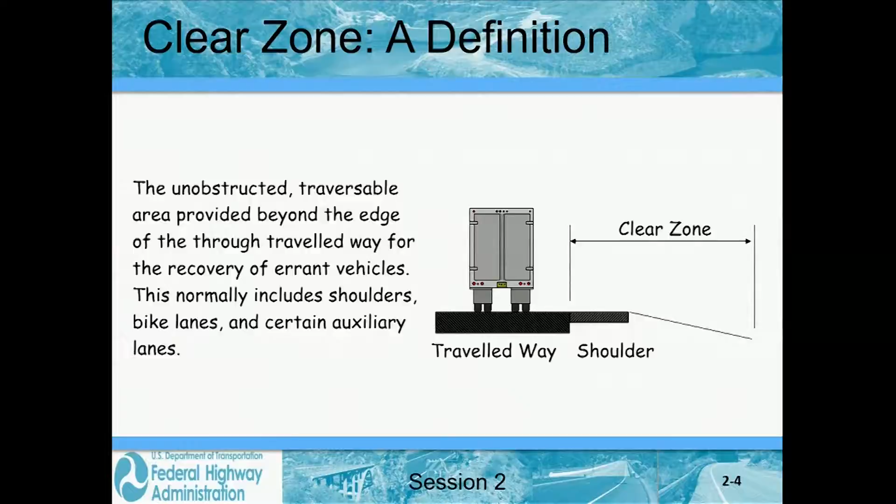30. For counties, it's probably pretty low, but if we're talking about state engineers and they were talking about freeways, 30 foot is a number that usually comes into play. But we're going to talk about that and tell you where it came from.

Okay, AASHTO started talking about clear zone way back in '74. How many of you were not even born in '74? That's a fairly old class. Usually at least half of you guys raise your hands.

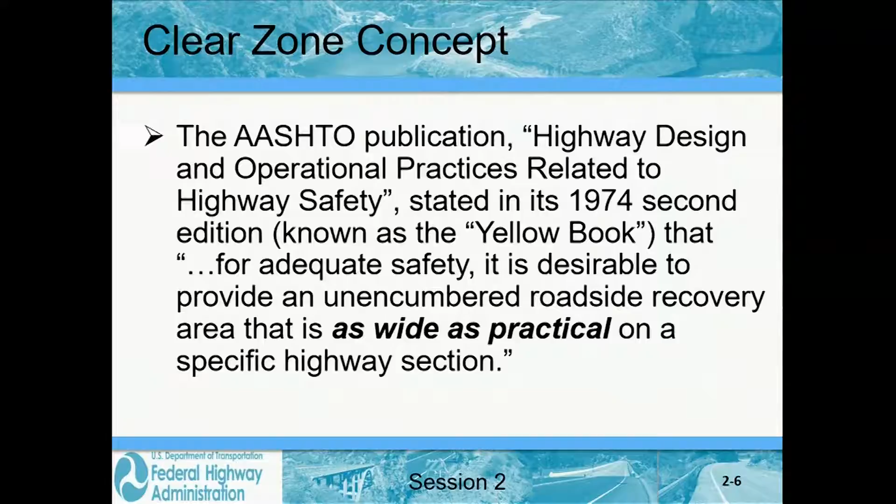Okay, anyway, it said it's desirable to have a recovery area, an unencumbered roadside area, as wide as practical. And as wide as practical makes sense.

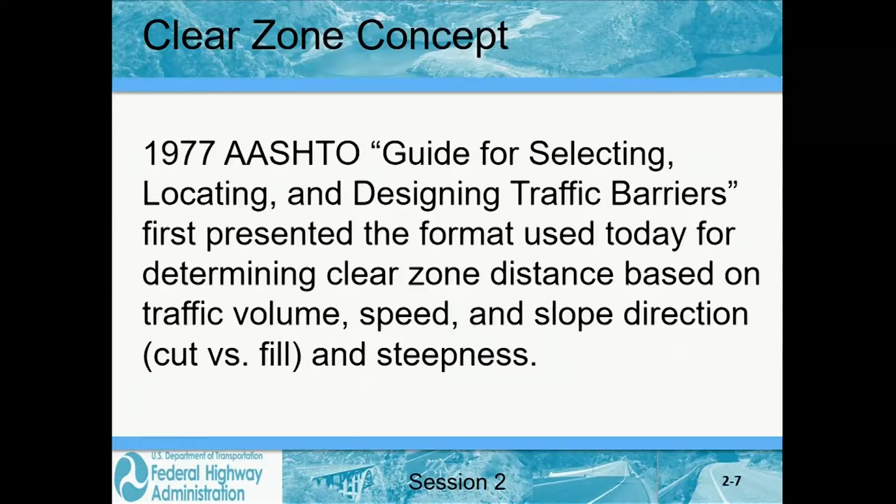But then the 1977 AASHTO barrier guide came out, and it said the clear zone isn't a fixed number - it varies depending upon some characteristics. And that includes design speed, which makes sense. The faster you're going, the longer it's going to take you to stop. Nobody's going to argue about that.

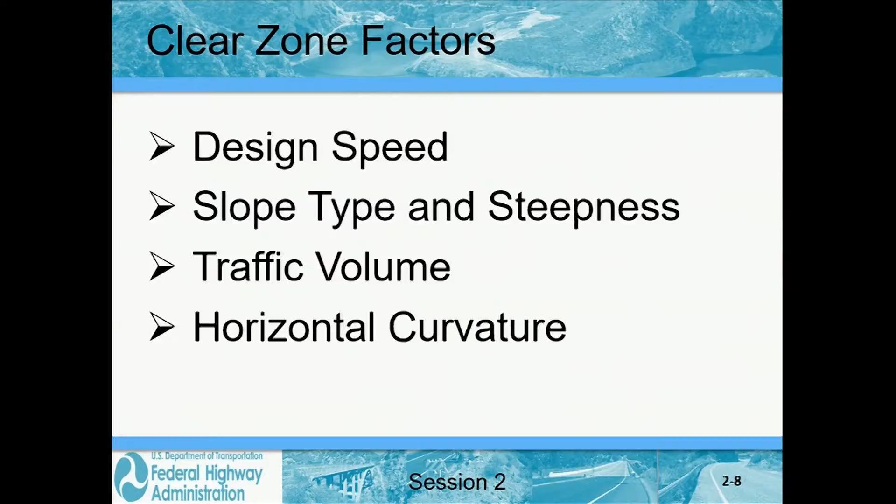Slope type and steepness - if you run off the road on a fairly steep slope, you're going to probably go to the bottom of the slope, so you're going to go further away from the road with less vehicle control than you would have if the roadside were flat. If you're running off the road on a cut slope, then gravity is working against you and you're not going to go quite as far from the edge of the roadway.

Are we still focusing on design speed, or are we shifting to target speed - like how fast we want the traffic to go, and keep that in mind when we're designing our roadways? Basically, for purposes of selecting a clear zone or other things, we generally use design speed because we typically know what that is. Obviously, in some cases the actual operating speeds are significantly less, at least on portions of the roadway, and in some cases they're probably more, particularly on some of the freeways.

Traffic volume. How does traffic volume affect how far you're going to go if you run off the road? Okay, the quick and dirty answer is it doesn't make any difference. If you run off the road at 70 miles an hour at a 10-degree angle, you're going to go the same distance.

Whether it's a county road versus I-5. So the only difference between those two is if you do it off the 5, there's probably going to be people watching you do it. If you're on a county road, you may be all by yourself.

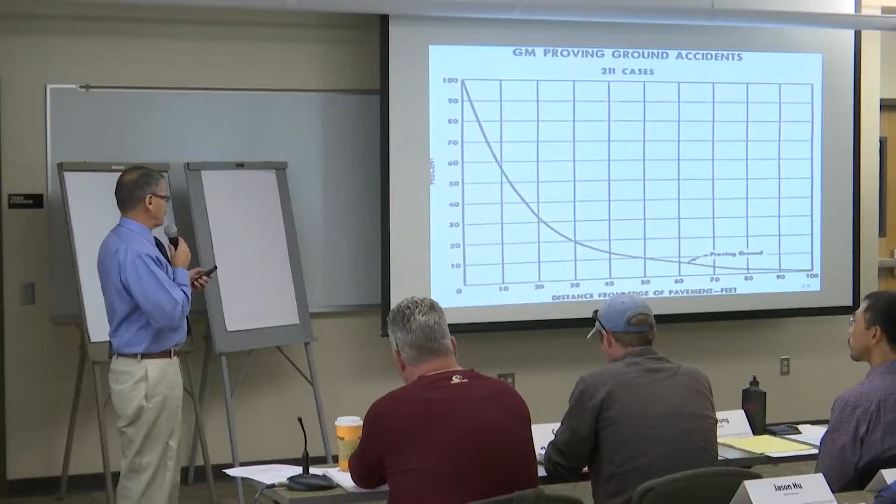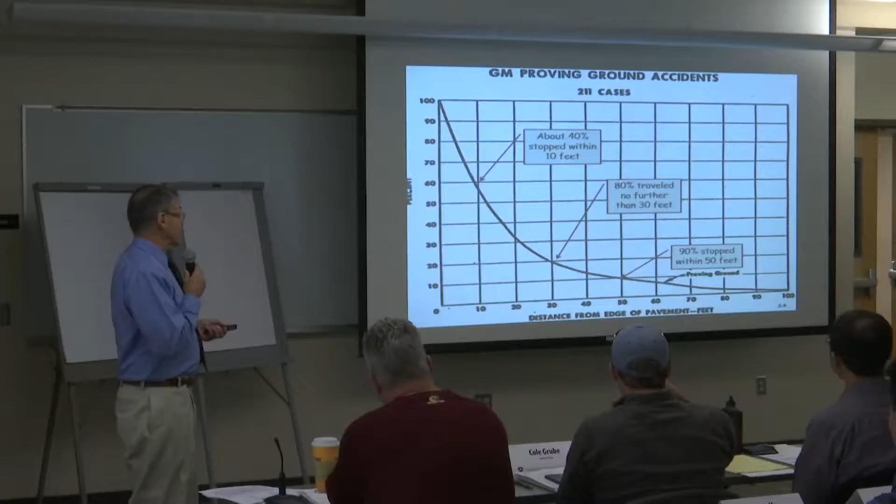So they did a study, and they only looked at just slightly over 200 instances where their test drivers ran off the track. After looking at each one, they found about 40% were able to stop before they went 10 feet laterally from the edge of the road. They looked a little further and found 80% didn't go any further than 30 feet. Continuing, they found 90% stopped within 50 feet.

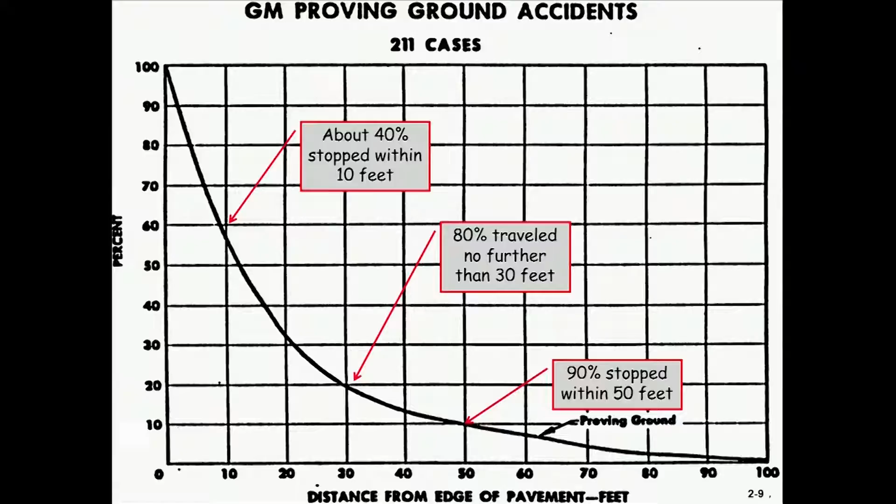So the engineers figured this was a pretty good break point. If we can provide a 30-foot minimum clear zone, then 80% of the vehicles that run off the road are likely to stop in that distance.

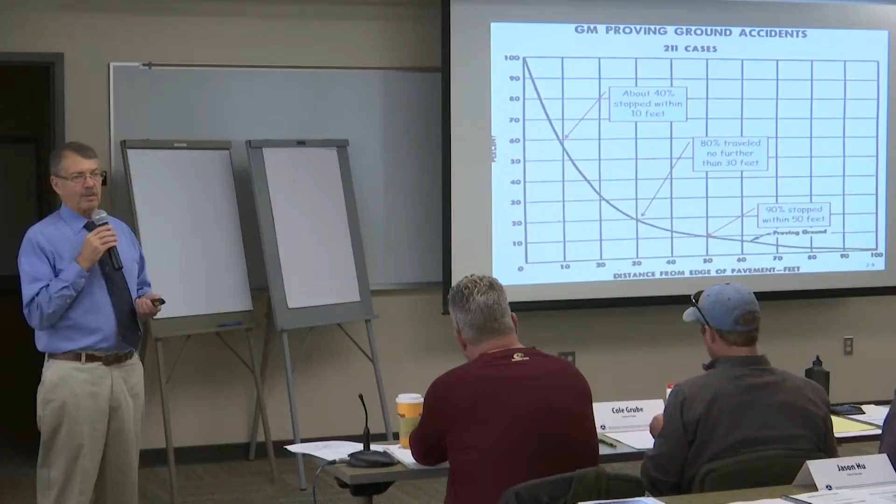But again, the data came from a very small number of cases. They were professional drivers or test drivers riding on a one-way familiar track, and it's not too surprising that they were able to do that. But that doesn't correlate to the driving population in general.

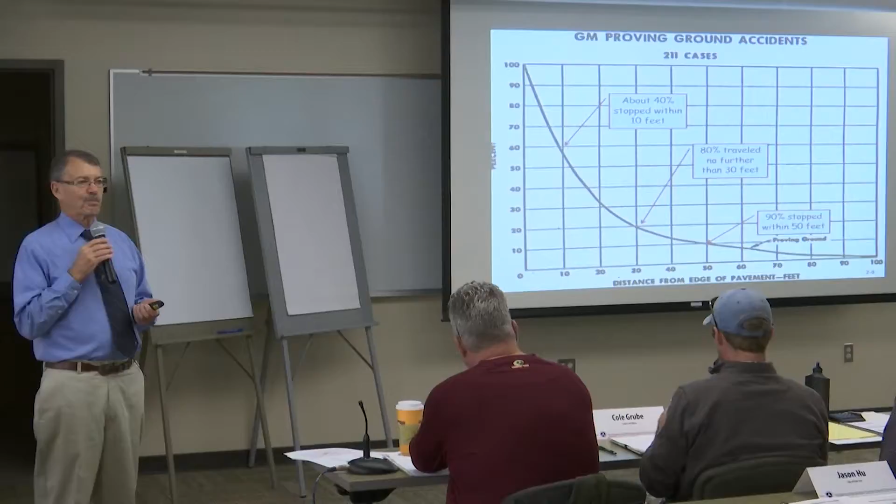Except for us folks in the highway profession, you don't see a lot of professional drivers on the road. You see people doing some pretty dumb things, actually. And we're not always driving on one-way roads, and we're often driving on roads that are unfamiliar to us. So that 30 foot is a minimum number.

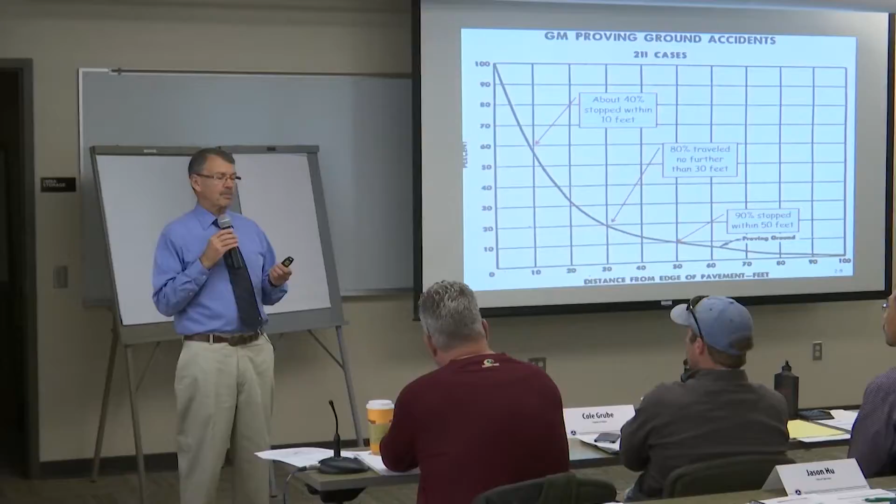It's better than we used to do because we used to not think about it at all. When the interstate was first built in the late 50s, early 60s, we had bridge piers right at the edge of the shoulder and didn't even think about shielding them. Well, we've come a long ways from that since then, so we're doing it.

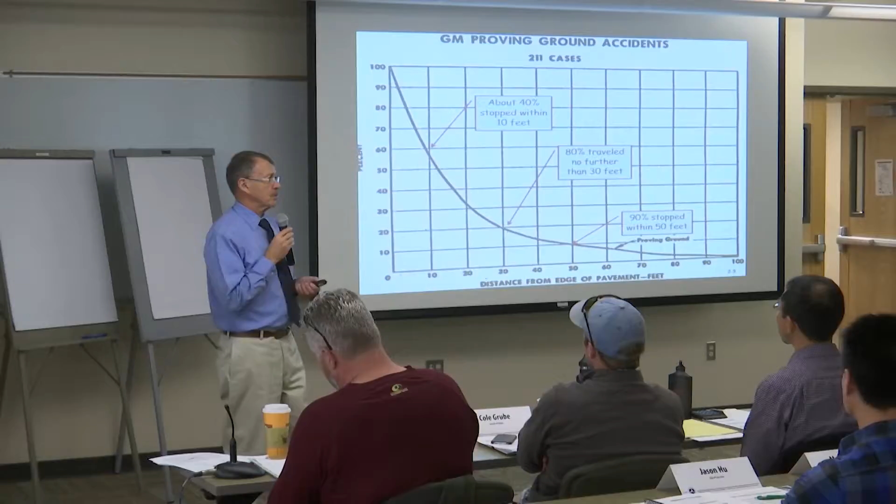Yes, sir? Just out of curiosity, on the vertical axis, that percent, what does that represent? I can't quite figure out how that relates to this graph.

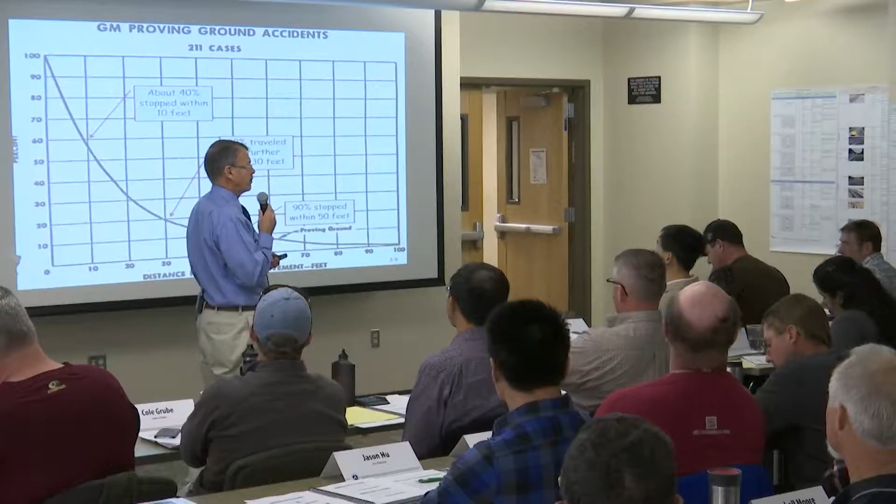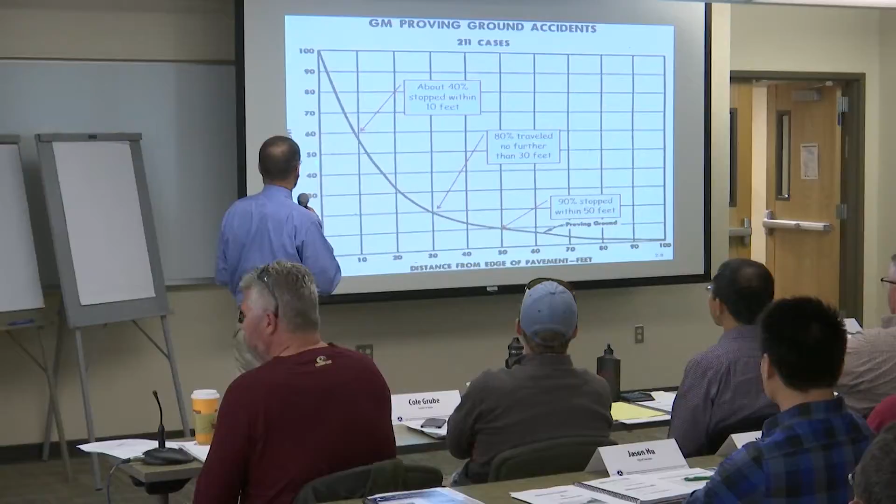Would you say it's 20%? Okay, this is 20% of the cases? This is a cumulative percentage of cases. In other words, 20%... and then this is a distance down here. So 20% were not able to stop, so 80% were able to.

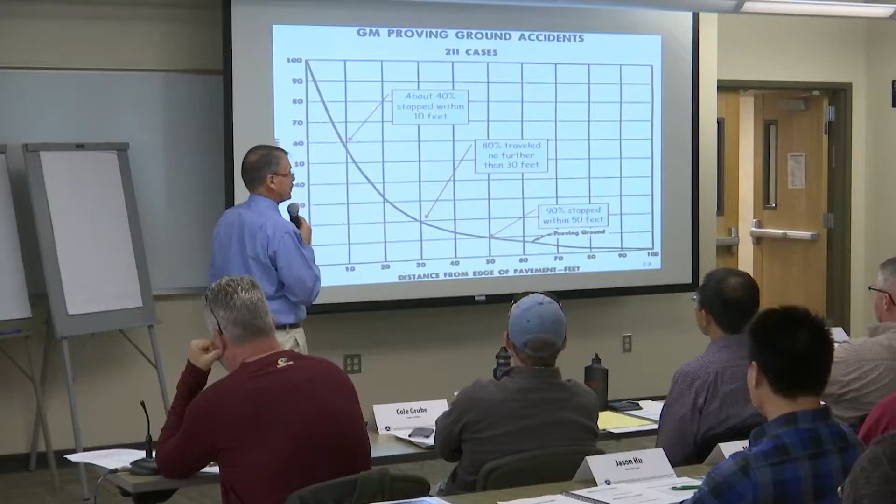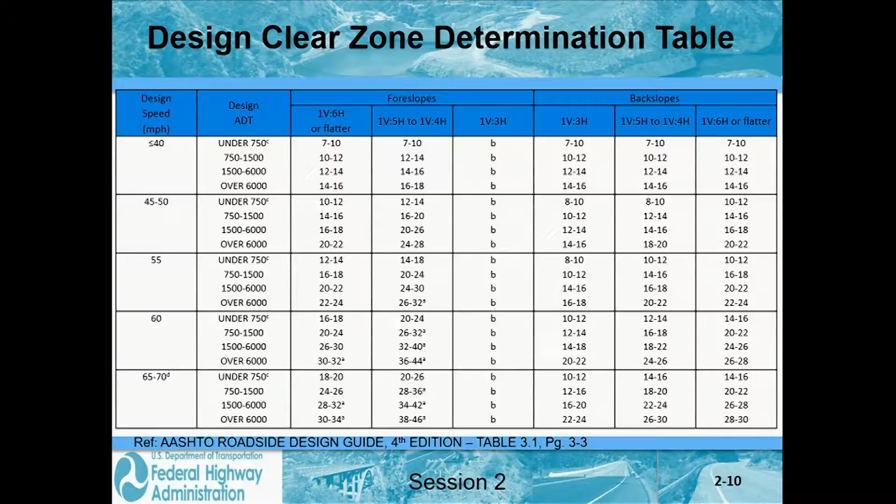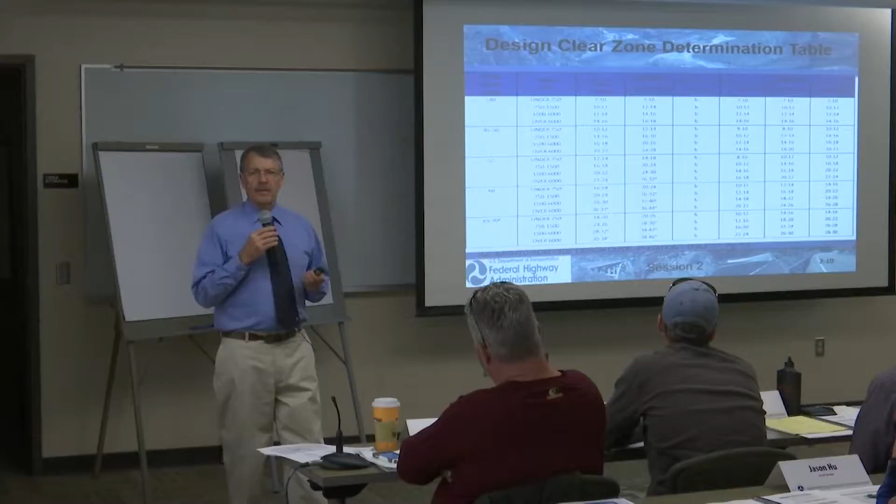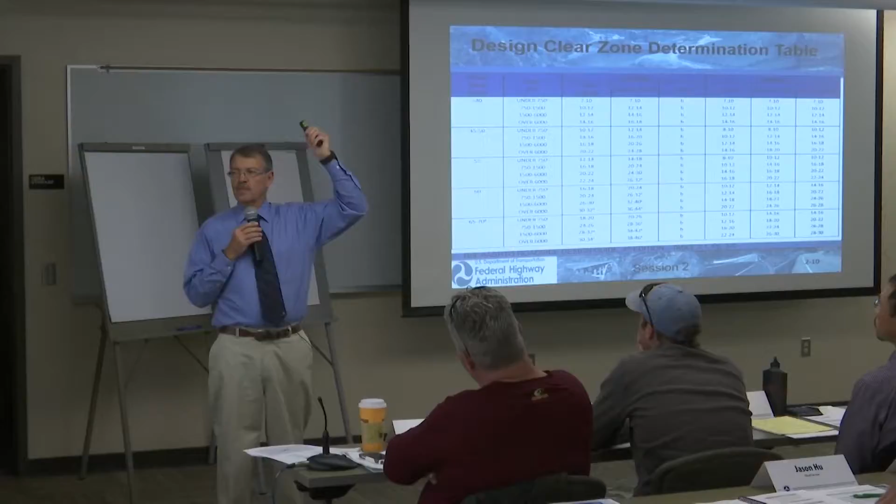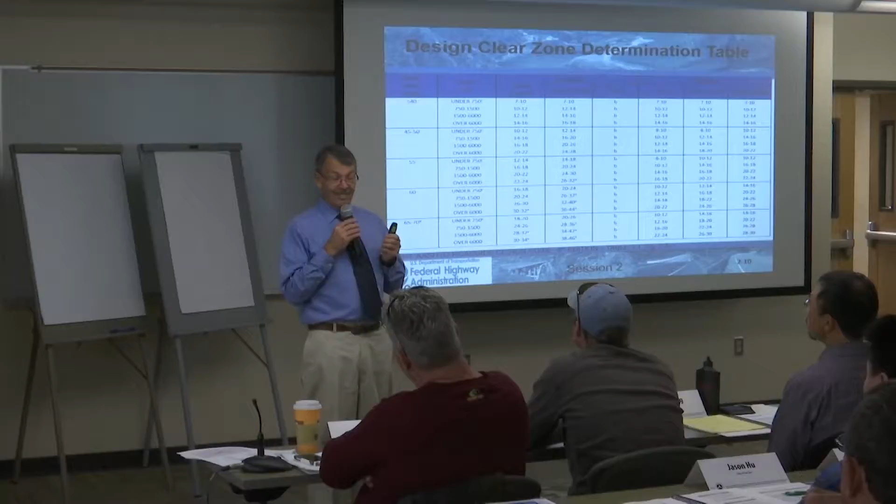How many of you have military service? Got a couple. How many are hunters? I thought maybe in the rural part of the state there'd be a few more hunters, but anyway. What do hunters and soldiers have in common? I asked this question, and I'm pretty sure it was in California about 20, 25 years ago, and someone in the back of the room said, 'They shoot people.' I decided I would never go hunting in California.

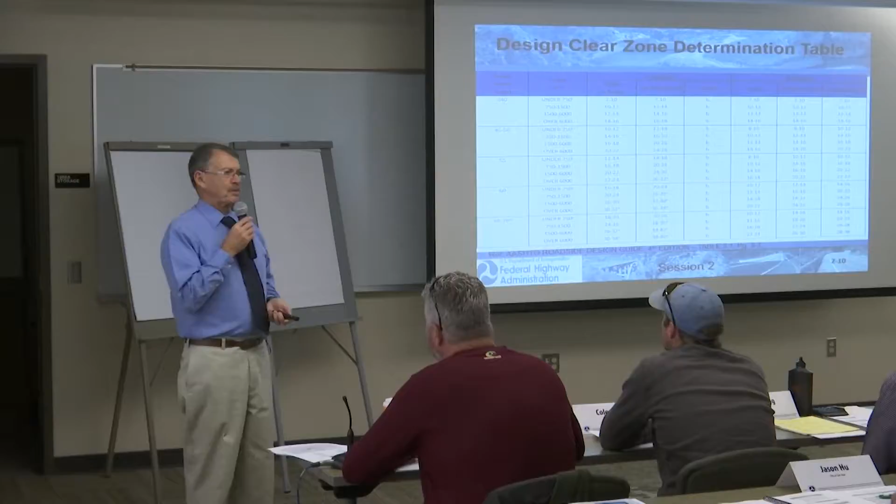But the answer I'm looking for, of course, is rifles. They have guns. And if you've been in the military, you may have spent half a day on the rifle range where you fire 3 rounds at a target and try to get all those bullet holes really close together. When I was a kid growing up in New Hampshire, before deer season, my dad and I used to go to a nearby sand pit for essentially the same purpose.

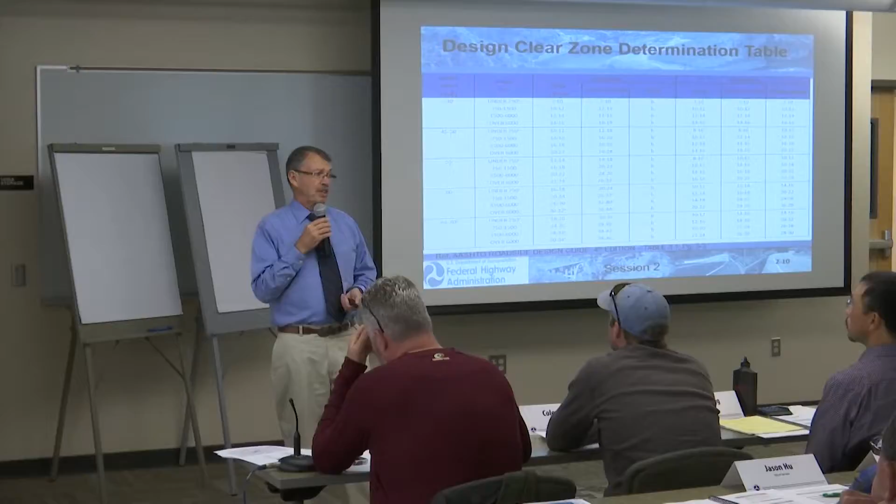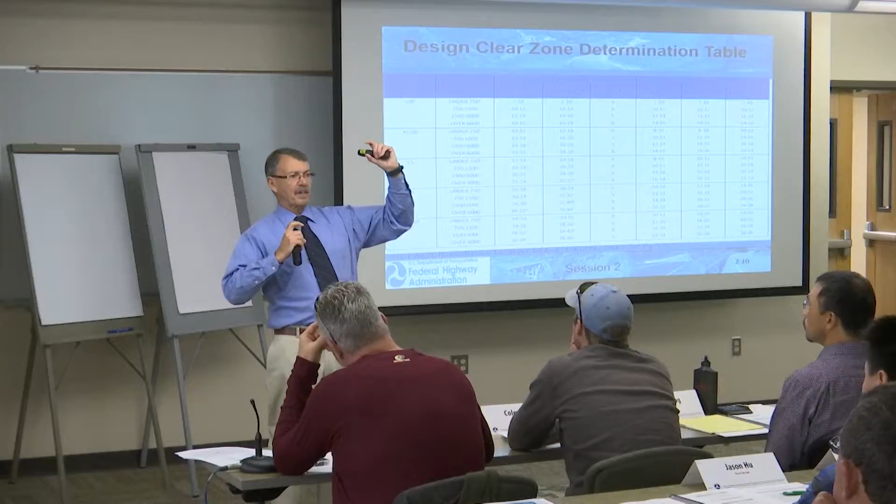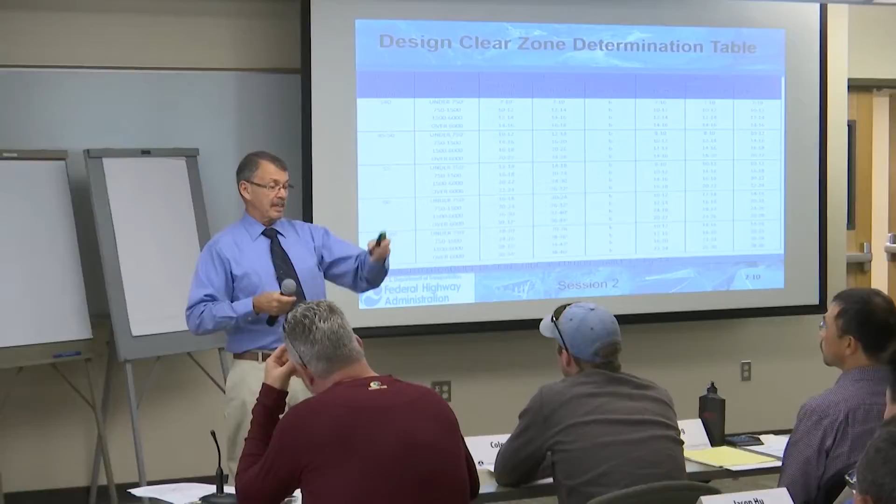We'd fire a few rounds at some targets, and if we hit them, the sights were set properly. But if you can get a grouping of bullets that's very, very tight, and the bullseye is down here somewhere, it's not very accurate shooting. It's very precise, the bullets are going where you want them to, but it's not accurate because you missed the bullseye. I like to use this analogy when I look at this chart. It's like, man, we've got that clear zone pinned down to within 2 or 3 or 4 feet, but as far as accuracy, plus or minus 50%.

Usually there's either dead silence or a bunch of sighs in the audience when I make that statement, because most of you are engineers, and you may have gravitated towards the engineering profession simply because you like numbers. You like to plug numbers into a formula and get the answer to 5 or 6 decimal places, right? For most of engineering, of course, you need to do that. You don't want your bridges falling down, you don't want your pavements rutting right after you open the road to traffic, you don't want your culverts washing out in a 2-year flood.

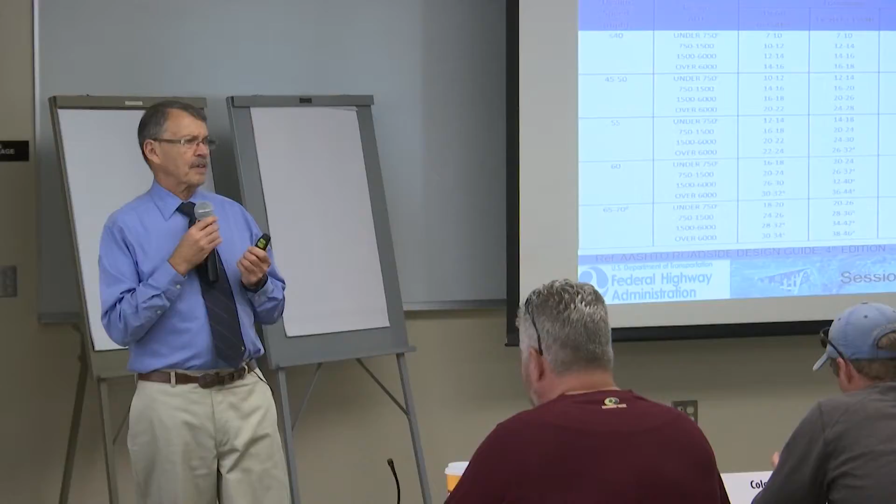So for most of engineering, you have to be both precise and accurate. But clear zone numbers are different, because there's no rule, no regulation, no physical limitation that says when you run off the road, you can only go 18 feet or 20 feet or 30 feet. Common sense will tell you that when you run off the road, you go until you hit something and stop, roll over, or are able to control your car and stop safely or return to the roadside. But 30 feet isn't very much distance when you're going 60 or 70 miles an hour.

So where does that lead you with clear zone? Keep in mind these are minimum distances. I like to paraphrase John Fitzgerald Kennedy: when you're asking, you don't ask how much clear zone do I need and pick this chart for minimum. You ask instead, how much clear zone can I reasonably get? And if you get as much as you reasonably, practically can, then you've probably done the best job that you can. You should always meet the minimum, or document why you didn't, but if you can get more than that, go for it.

One example: if you've got a culvert that's 10 feet from the edge of the road, and you go through all the trouble of extending the culvert and putting a new end wall on, and when you're done it ends up 20 feet from the road, you've done a little bit of good. But if you're going to extend something, you should extend it far enough so it's almost unlikely to be hit.

Crash rates on curves -- again, all other things being equal, the crash rate on a curve could be 3 times as high as it would be on a tangent section of roadway. If somebody's going too fast for conditions, or just plain too fast and not paying attention, they're probably not going to run off the road on a straight section unless they fall asleep, but more likely on a curve.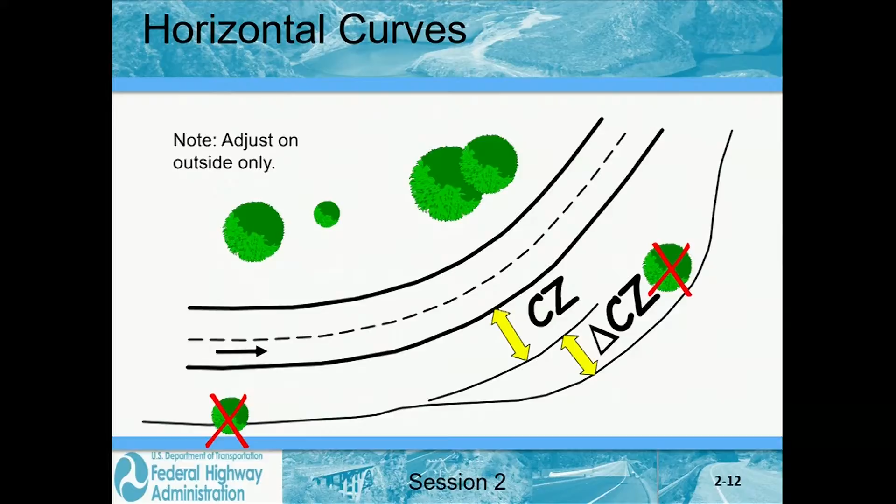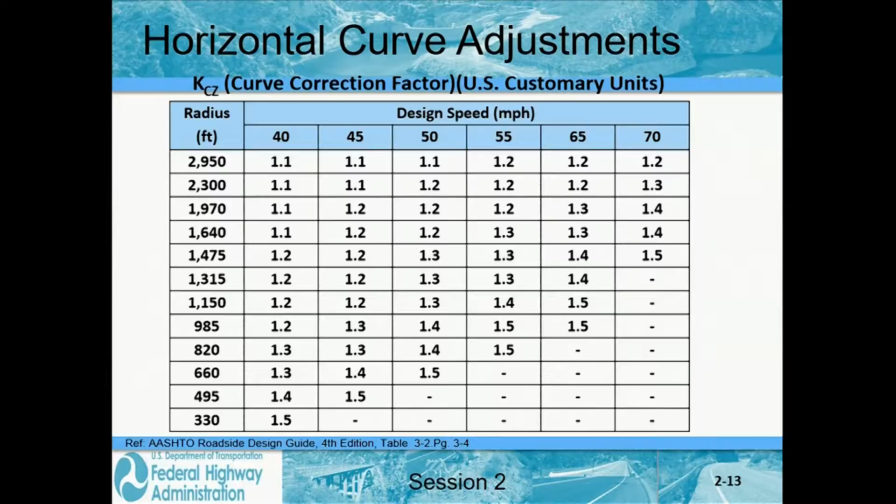So what the roadside design guide suggests is that you extend the clear zone on the outside of the curve. How much? It depends on the design speed, the sharpness of the curve, and then you multiply the standard tangent clear zone by a factor. You can see here the biggest factor is 50%, or 1.5. So if you've got a sharp curve and your normal clear zone is 20 feet, you say, okay, we'll make it 30 feet on the outside of the curve.

Some states do this, some states don't. But if that additional 10 feet or so isn't flat and traversable and recoverable, then you're probably wasting your time messing with it, because it's not likely to do much good.

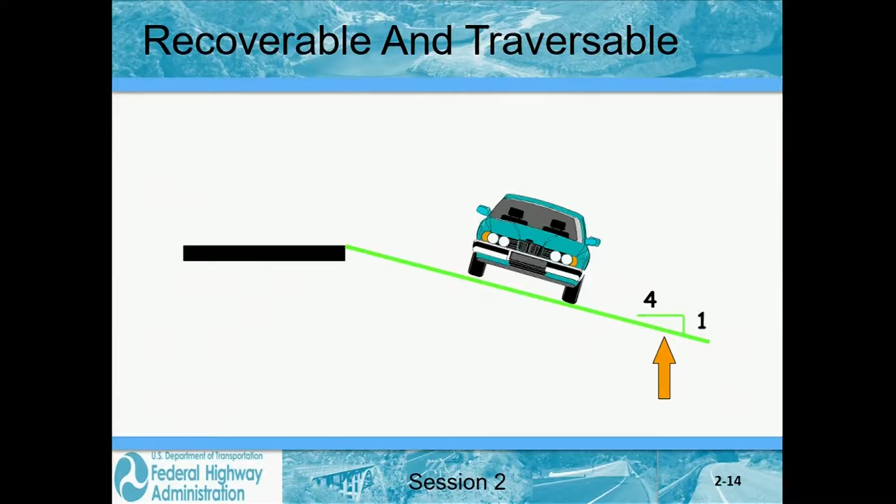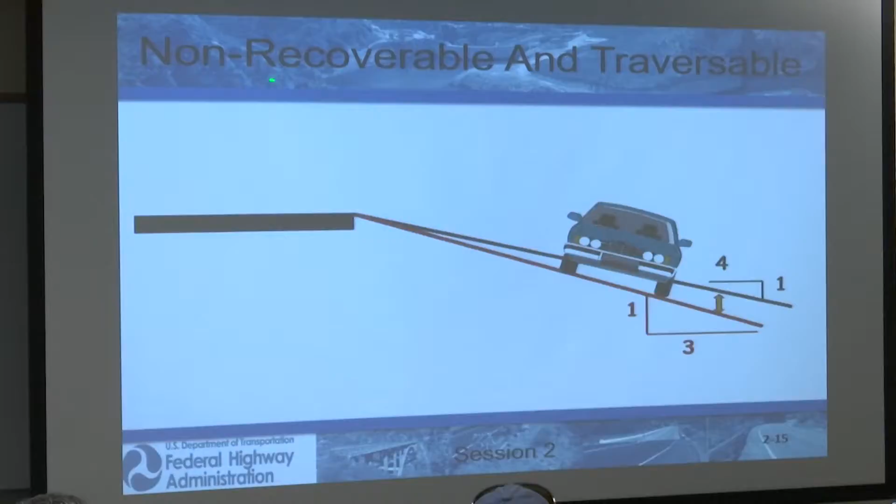We talked a little bit about traversable and recoverable. If it's flatter than 4 to 1 and it's a solid slope with no obstructions on it, recoverable and traversable means you can drive on it, you can stop on it, you can turn and get back on the road. If it's between 3 to 1 and 4 to 1, it can still be traversable, again if it's smooth and firm and not rutted and doesn't have anything on the slope, but it's non-recoverable because you're likely to go to the bottom of the slope. And then finally, if it's steeper than 3 to 1, you're probably going to go to the bottom of the slope with your wheels pointing skyward.

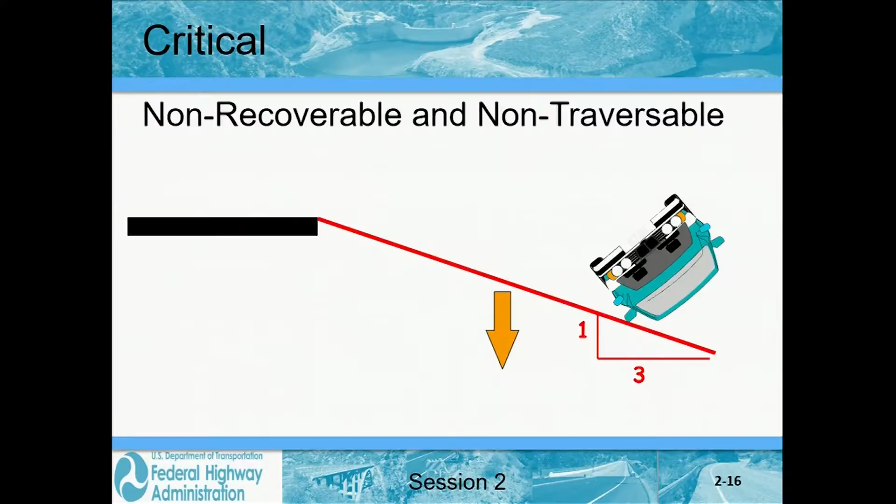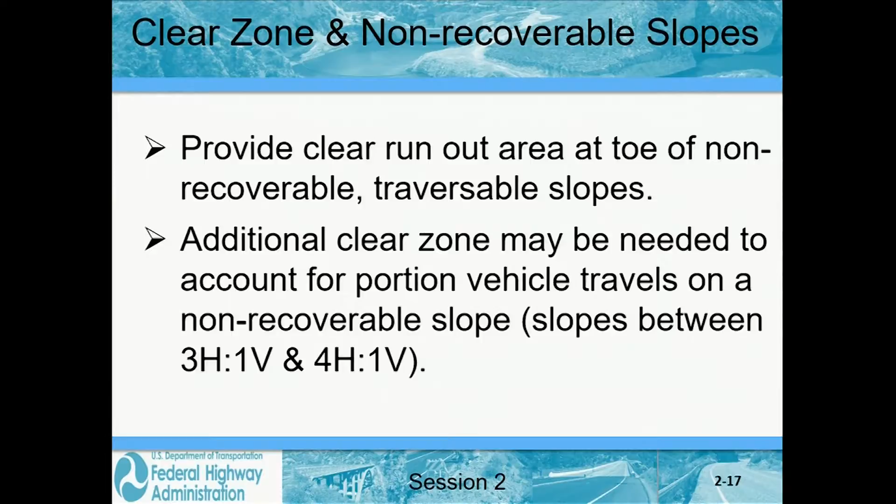So for non-recoverable slopes, it recommends that you provide a clear run out at the toe of the slope, and additional clear zone may be needed. A lot of words here—let's see what that basically means.

Again, in a lot of ways, this is kind of playing with numbers. Whether that's going to do any good to a motorist is a little bit hard to tell. But I will say this, it worked for me once.

At one point in my career with Federal Highways, I worked in New Mexico, and I was going down to a plan-in-hand inspection. I hit some black ice on a curvy section of road, and being a professional driver, I countersteered in the correct direction, and I kept fishtailing, and before I knew it, I was going practically straight down a slope that I swear was 2 to 1.

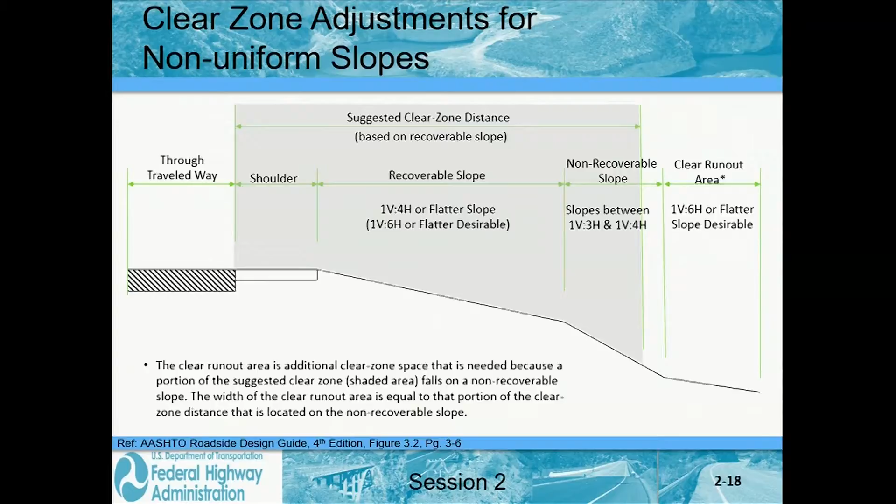I looked ahead through the windshield, and I saw this pinon tree at the base of the slope, and I knew I was going to dent that government car. Just as I got to the base of the slope, the car spun sideways and stopped. Absolutely no sheet metal damage whatsoever.

So I had 2 blown out tires, but I'm not sure if that occurred bouncing down the hill or when the wrecker pulled me back up on the roadway a couple hours later. But at least in one instance, a recovery area at the base of the slope did what theoretically it's supposed to do. But I wouldn't count on that happening again.

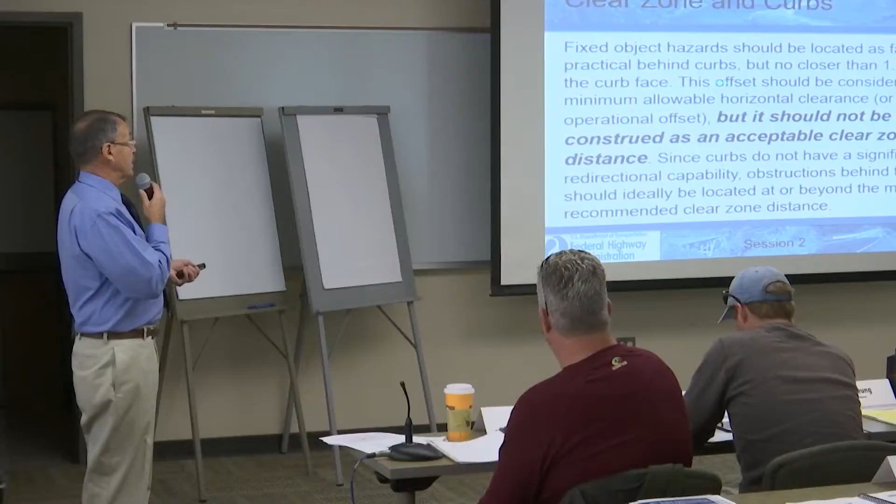But again, from a practical standpoint, in most urban areas or built-up areas, you're never going to get that. So what you do need to get, though, is an operational distance. This 1.5 foot is considered an operational offset. So if somebody's parking against a curb, they can open their doors. If some truck has large mirrors, it doesn't clip on the utility poles or the sign supports or whatever you might have. So it's important to remember that 1.5 foot is not a clear zone.

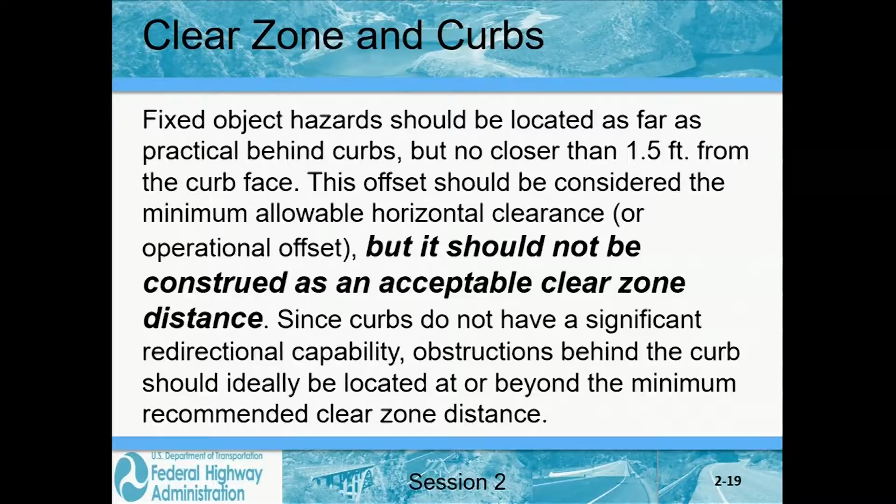It's an operational offset. And this afternoon, we're going to talk more about guardrail and curbs and talk about what some of the things that can be done.

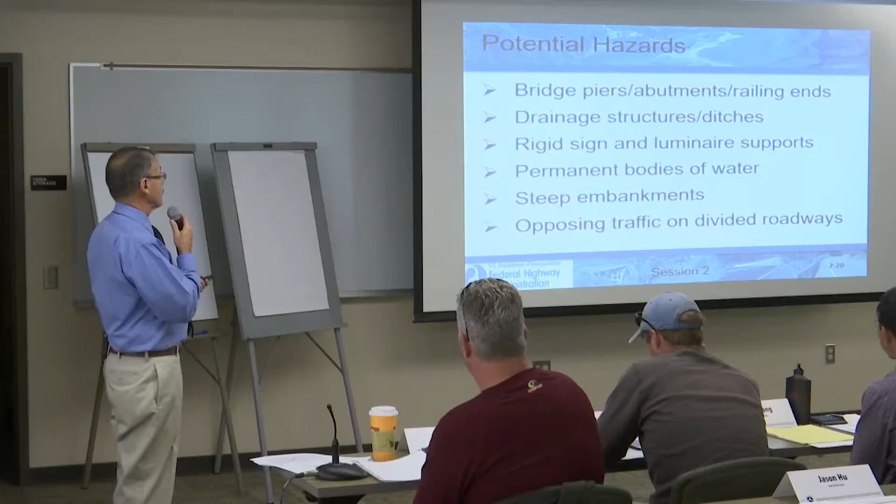For potential hazards, obviously you can tell with bridge piers, large ditches, non-breakaway sign and light supports, bodies of water, steep embankments, and of course opposing traffic on divided freeways. Those are all things that you don't want to hit.

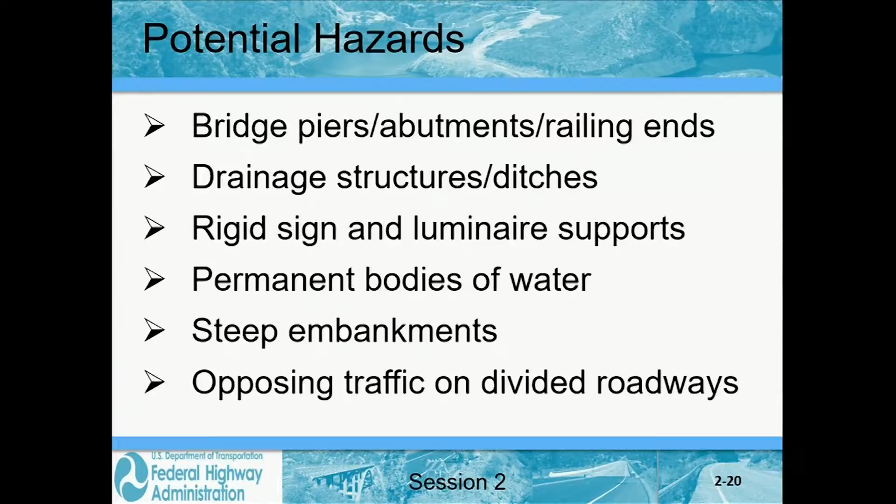All other things being equal, hitting a properly installed, designed, and maintained guardrail would be preferable to hitting any one of these things. But in addition to what the objects are, it's also important to keep in mind where are they in relation to the roadway? Are they likely to be hit? We'll talk a little bit about that.

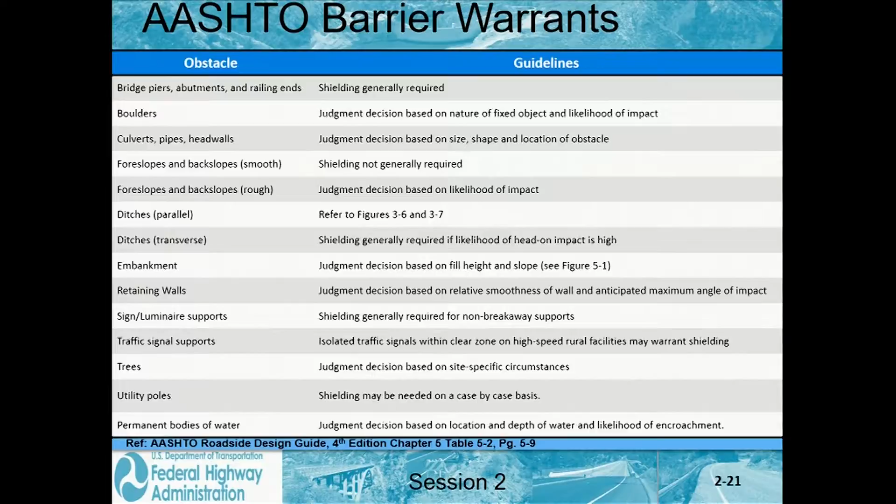If you look at the barrier warrants in the AASHTO Roadside Design Guide, it's got, again, the list of things that might be shielded occasionally. But if you look at the guidelines, it's generally required, a judgment decision, not generally required, judgment, generally required, judgment. A lot of things are not black or white. You're going to have to make an intelligent decision in the field as to whether or not some of these things warrant shielding by themselves and warrant shielding because they're in a vulnerable location.

And that's where a clear zone comes in. Again, typically if something is outside the minimum clear zone, you don't shield it. But in some cases, that may not be the best approach.

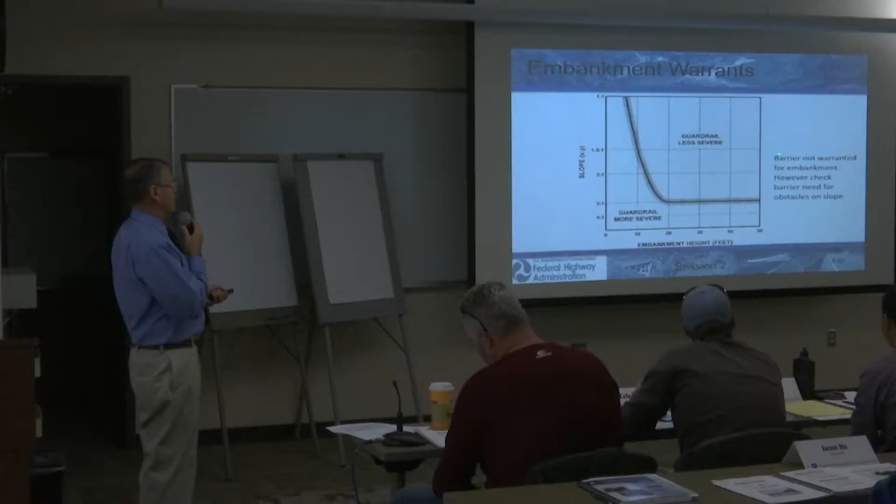Embankment warrants, this is from CalTrans. Basically, they say if the slope is flatter than 3 to 1, generally the guardrail is worse than running down the slope. But it's important to keep in mind that the barrier is not warranted for the embankment itself, but there may be obstacles on the slope, or there may be trees, a river, or railroad tracks at the bottom of the slope that would require some shielding.

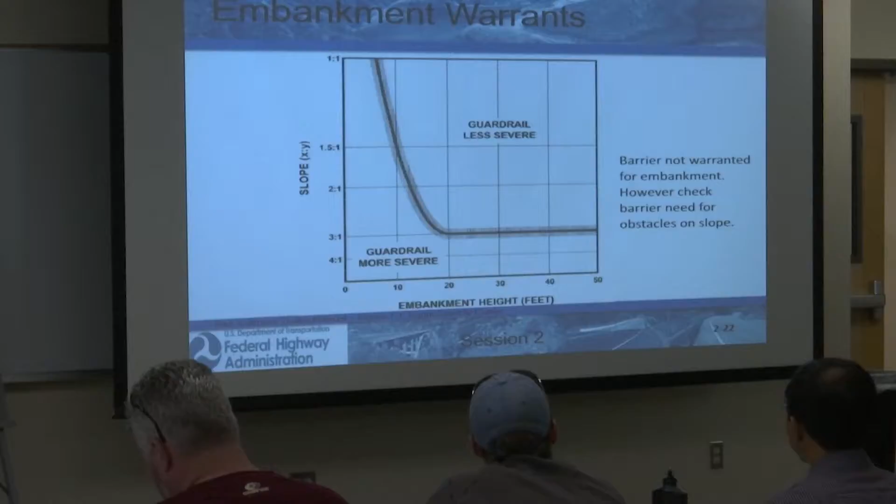Again, you normally do not put in barrier if hitting the barrier would be more severe than running off the road at the same location.

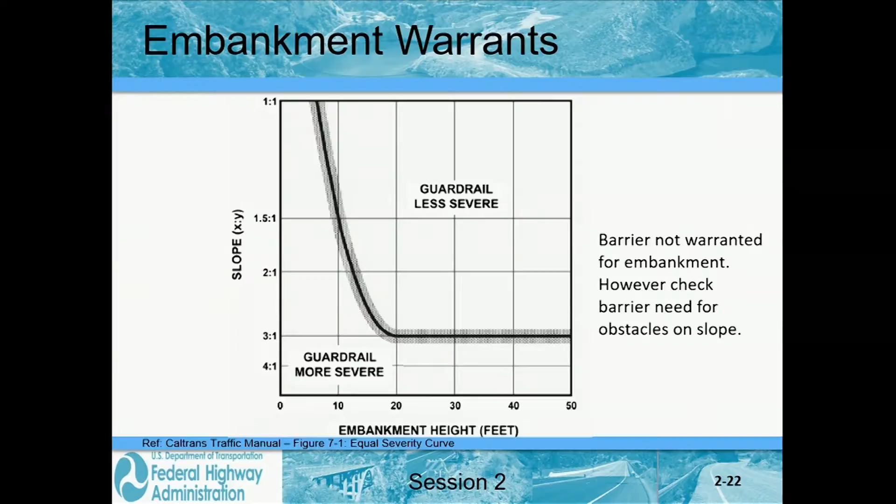Now, that's easy to say, but trying to make a decision in the field about what is better or worse is another story altogether. It's a tough decision sometimes.

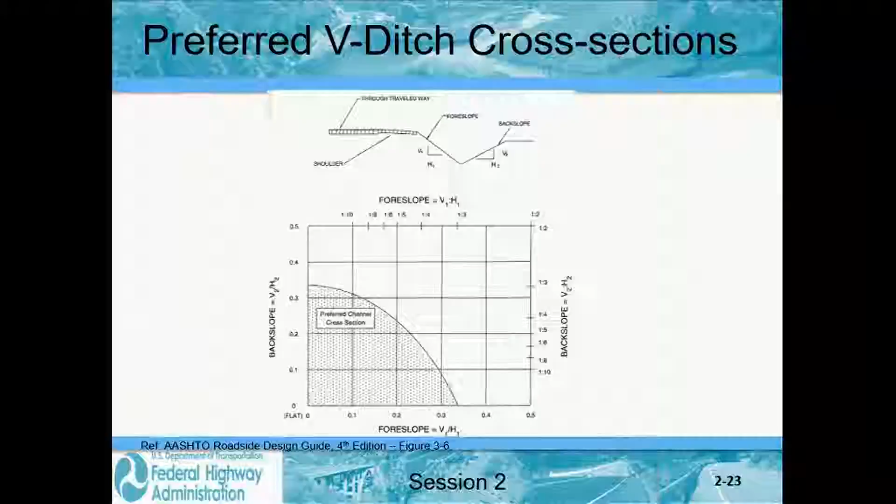Cross sections, again from AASHTO: if the foreslope and back slope combination end up in this gray area, it's considered a traversable ditch. If they end up outside this area, the ditch is so steep that a vehicle is either going to nosedive into the back slope and stop, or possibly overturn or do something else.

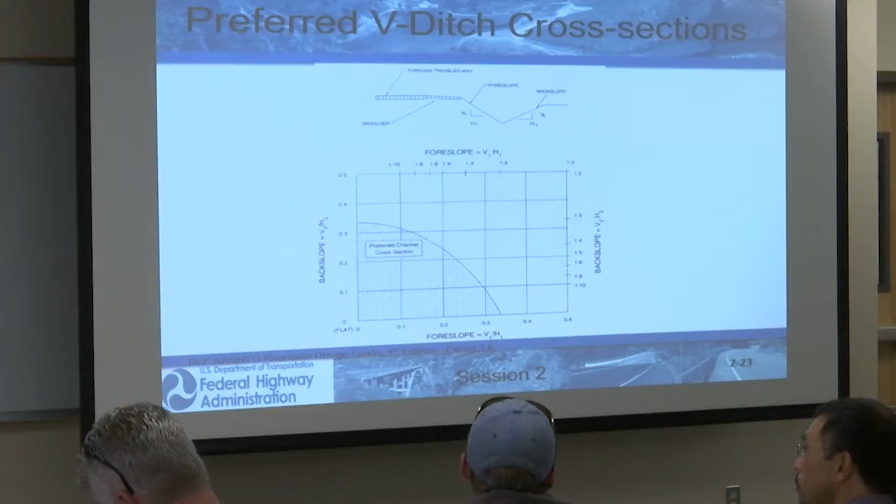Now, on a lot of county roads, the right-of-way line is probably right off the edge of the pavement. I think there are a lot of county roads where the width of pavement is almost equal to the right-of-way you have, so it's pretty hard to modify a ditch when you have a situation like that.

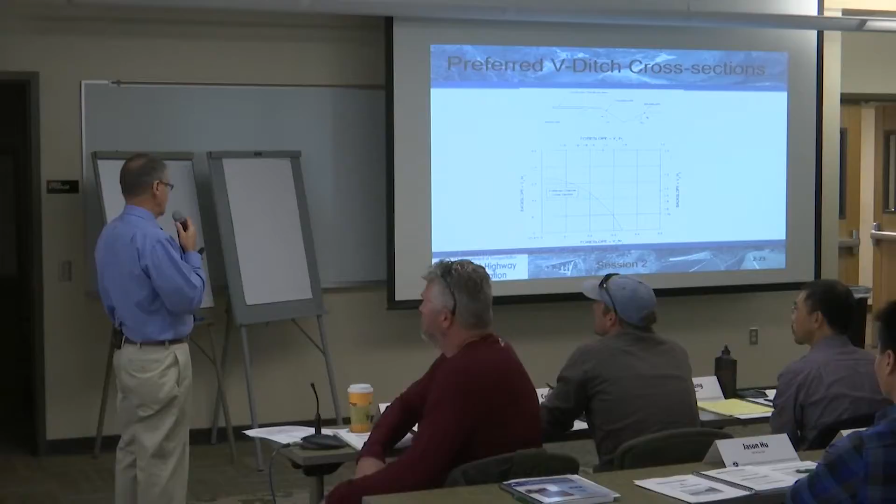But if you can't get in the preferred area, the best compromise is to make the foreslope as flat as you possibly can. Then even if the back slope is relatively steep, if it's a smooth back slope without a rock outcropping or something, probably the worst that would happen is the vehicle would slide to the bottom of the ditch and scrape the passenger side along that vertical portion. Again, if it's a smooth, earth slope, probably not a big deal.

I work for the county, and there are some projects we have where the trees grow right against the road. When you do a modification to get your recoverable slope and clear zone at the bottom, it would require more right-of-way to be purchased, and additional trees would be taken out, so we're weighing the pros and cons on whether to provide that.

Okay, you basically have several projects where trees are essentially right at the edge of the roadway, and the question is whether it's worth the hassle of removing the trees and providing a slope and some type of recovery area, or simply repaving the roadway and leaving the trees right next to the edge of the road. Well, my answer to a lot of questions is going to be: it depends.

Now, I know there's a lot of rural roads in California with trees right next to the road. I think one of the most obvious examples is Redwood National Park. You drive through there and you've got these monster trees just inches from the edge of the road, and nobody in his right mind is going to suggest you cut those down.

If they're just small trees or volunteer trees and you get them while they're young enough, you may be able to do it. But in any case, it's likely to be a compromise.

If you can't do anything else, as you saw on Will's chart, the last thing to do is delineation. If you can put some delineation by the trees, particularly the ones closer to the road than anything else, that may in fact be the best you can do. Again, no simple answers to some of those questions.

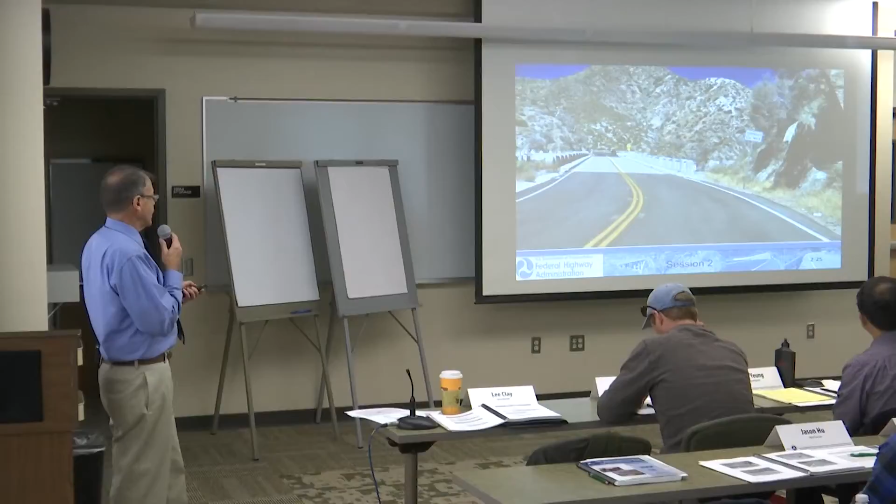I don't know why this other slide isn't coming out. Okay, how about this one?

Now, we're driving by there pretty fast, I wasn't exactly sure what that was. I don't know if it's an ancient culvert head wall, old building ruins, or what not. But as you can see, it's right in the middle of the curve, and regardless of what it is, it's probably nothing that you want to run into.

So the question again: should it be shielded? The best choice is to get rid of it, get it out of there if you can possibly do that. If you can't, and if you don't have the money to put in barrier, at least this might be a curve where chevron alignment signs could be very effective if you don't actually go ahead and put in the guardrail.

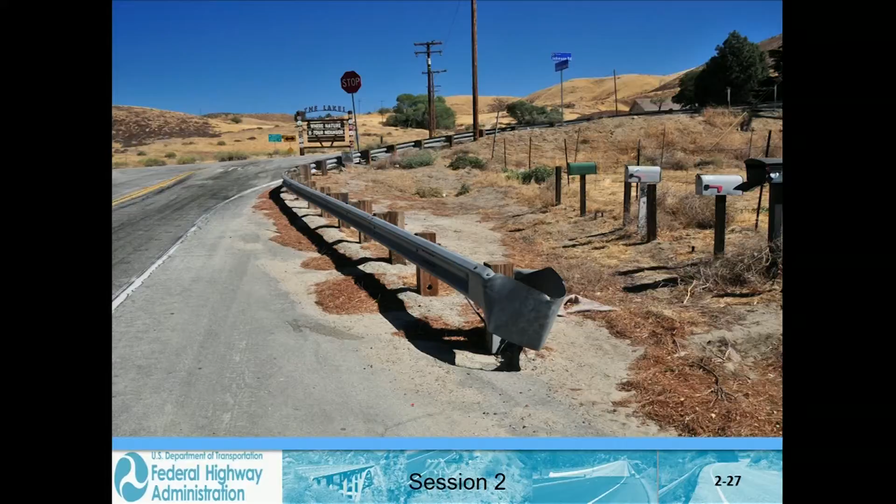But I think you've hit on what I'm looking at here. The barrier should be better than the hazard. What's the hazard here? Those mailboxes aren't particularly hazardous, and even if they are, they're well off the road, and it's a stop condition anyway, so the speeds are going to be relatively low.

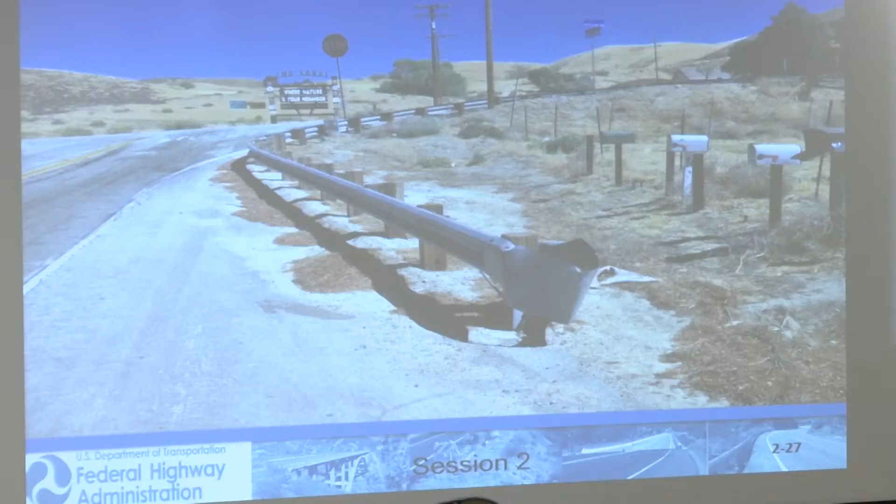However, I would bet that if somebody hit this old BCT terminal, the maintenance folks would go back and either replace it with a current crash-worthy terminal or replace it exactly the way it is now. What they should do is consider pulling all that guardrail out, because the guardrail is obviously the worst hazard there, as opposed to just running off the road at that point.

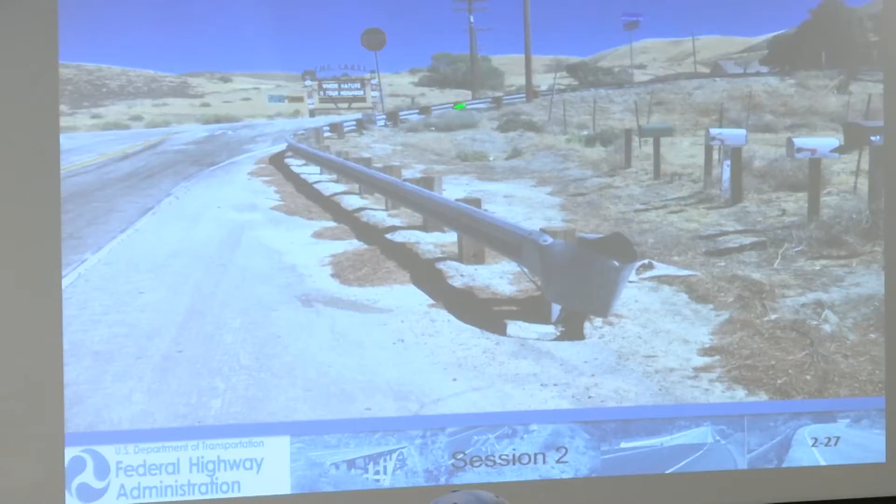In fact, when I made the presentation in Los Angeles, someone came up to me afterwards and said, 'Hey, we're doing a project here. What should we do with the guardrail?' And of course, not being there on site, I suggested if it's really needed up here, then you can terminate it here with a crash-worthy terminal. If it's not needed here, and from the picture that looks reasonably recoverable, then just take it all out. Don't put it back in. But the first thing maintenance people typically do when something is hit is they go back and fix it like it was or upgrade it.

And the first thing you should do is ask yourself, do we really need barrier here? Is it doing us any good? And most of the time the answer will be yes, but occasionally it will be no. Remember, barrier is a hazard.

You saw again in Will's presentation that in California there were something like 90 crashes where the first thing people hit was guardrail, and in 2/3 of those cases the guardrail actually killed them. I think it was 90 first harmful event and 60 most harmful event. So guardrail can be dangerous, and you need to keep that in mind and minimize the use of it to the extent that you really can.

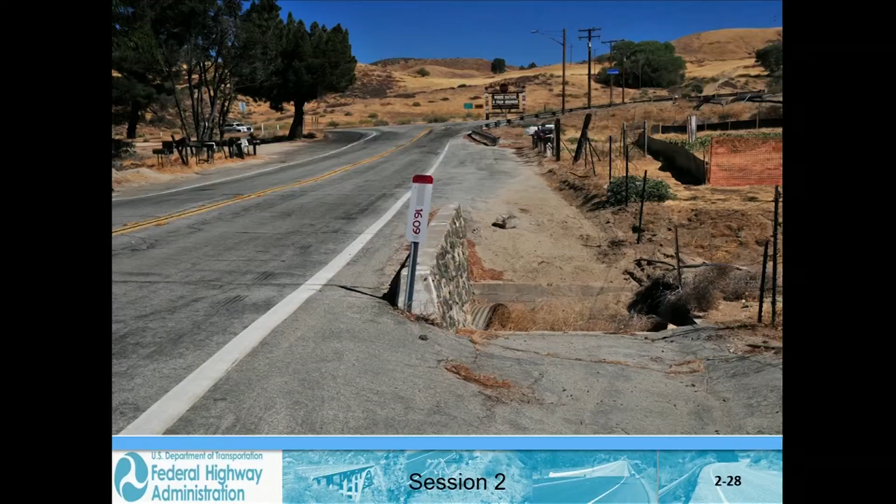Okay, this is a little bit further down the road from the mailboxes, but yeah, that's a pretty big hole. And again, if you can extend the culvert and get it out beyond the right-of-way fence and get rid of this vertical concrete head wall, that's certainly the #1 choice.

Single delineator does a little bit of good, but if all you're going to do is delineate it, a series of hazard panels leading up to the hazard would be a lot more effective. It would provide much better positive guidance to a motorist coming up to this intersection.